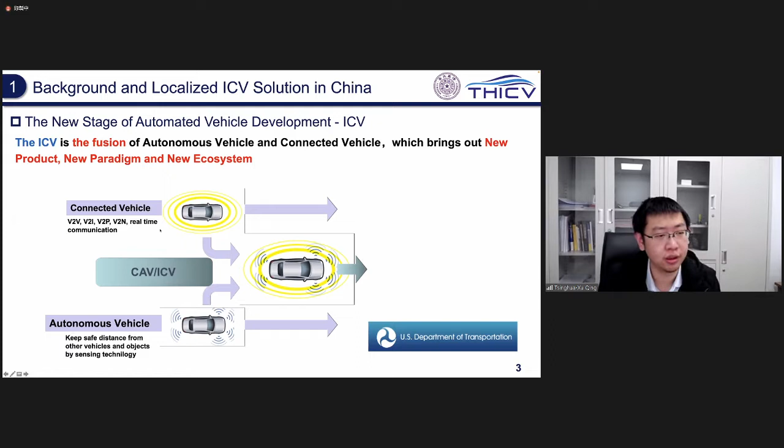Different from conventional vehicles, there are two major features of intelligent and connected vehicles. Number one is the interdisciplinary and cross-industry integration. So as shown in the slide, unlike the conventional vehicle, which is a mechatronic product, ICV requires the fusion of mechatronics and ICT technologies, including communication, computing, and so on. This underlines the industrial integration of automotive, transportation, information, and communication technologies.

And number two, ICV has strong regional and social properties. The operation of ICV requires support of telecommunication, maps and data, and so on, which are under security monitoring due to national security sensitivities. So each country, including China, has its own standards and regulations. Localized factors exist in the development and application of ICVs.

The Chinese government promotes policies and regulations for ICVs very actively. The government has established some cross-department coordination processes and formed some top-level design for the development of ICVs. For example, the Ministry of Industry and Information Technology launched the ICV Development Action Plan, which is very important. The Development and Reform Commission launched the ICV Innovative Development Strategies. The Ministry of Transportation strengthened product application and pilot demonstration, and the Ministry of Natural Resources expanded the market of map and positioning applications.

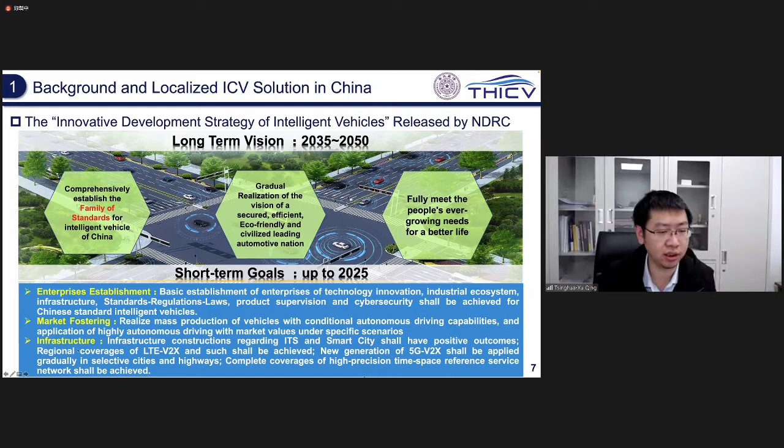For example, the Innovative Development Strategy of Intelligent Vehicles released by the NDRC, which is short for National Development and Reform Commission. In their strategy, there is both a long-term vision from 2035 to 2050 and some short-term goals up to 2025. For the development of ICVs, they try to stimulate enterprise establishment, market fostering, and infrastructure development and deployment.

A localized solution for ICVs in China is very necessary. There is yet no experience of successful applications of ICVs anywhere in the world. The localized solution of ICV innovation and development in China shall be planned not only according to the needs of technology and industry development, but also considering some specific conditions in China.

So to develop automated driving vehicles, there are two approaches. Number one, shown in the first picture, is the incremental paradigm of vehicle intelligence level improvement. This means to gradually increase the intelligence level of automated vehicles from level 1 to level 2, level 2 to level 3, level 3 to level 4, and so on. However, current gaps in automotive electronics, control, and actuator designs in China would be continuously expanded following this process, and might result in, as shown in the slides, hollowness of the core technologies in the automotive industry.

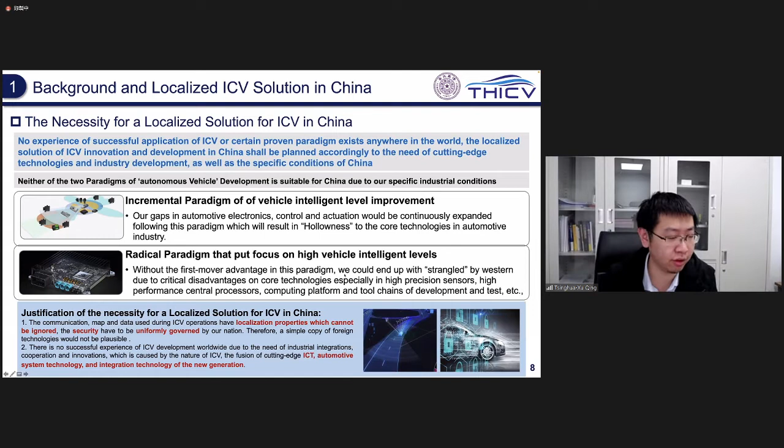What are the localized ICV solutions? The localized ICV solutions in China should follow the following three standards. Number one is to comply with Chinese infrastructure standards, including the standards for the roadside infrastructure, map data, V2X communication, and so on. Number two, they should follow the Chinese connected operation standards, including standards of ICV access, supervision of connected operation, information security, and so on.

Number three, they should comply with the new standard architecture of automotive products in China, including standards of intelligent terminal, intelligent onboard computing system, the cloud control platform, and so on. That requires us to design and develop some unified fundamental technologies to support the automated driving applications.

So to do so, the experts in China had a long-term discussion. The conclusion was that 5 basic platforms must get developed, and they are the basic computing platform, basic intelligent terminal platform, basic cloud control platform, basic dynamic HD map (high definition map) platform, and cybersecurity platform.

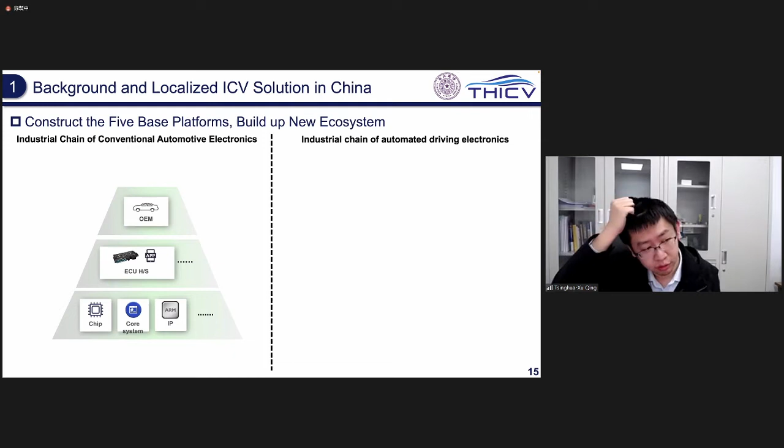Those 5 basic platforms will provide fundamental and common technologies for the automated driving application developers and decouple them from the unique Chinese standards. To better understand what we said in the last slide, we can have a discussion on this slide. So currently, there are OEM, Tier 1 and Tier 2, maybe Tier 3 and so on. Tier 1 companies provide the product to the car OEM, and Tier 2 companies provide some key components like chips or core systems, or maybe some IP cores to the Tier 1 companies.

In the future, there will be some space between Tier 1 and Tier 2. We call them Tier 1.5 companies. Those companies will work on some new crossover technologies, like the basic software architecture, some AI applications, and so on. And the basic platform components and services shown in the last slide will be their output, will be their product.

So in this slide, we take the basic onboard computing platform as an example. The companies below Tier 1.5 provide the basic computing platform, which includes the chips and IP cores from Tier 2 as before, and Tier 1.5 provides the ICV OS, which is an extended OS concept, some function software, and some basic board reference design.

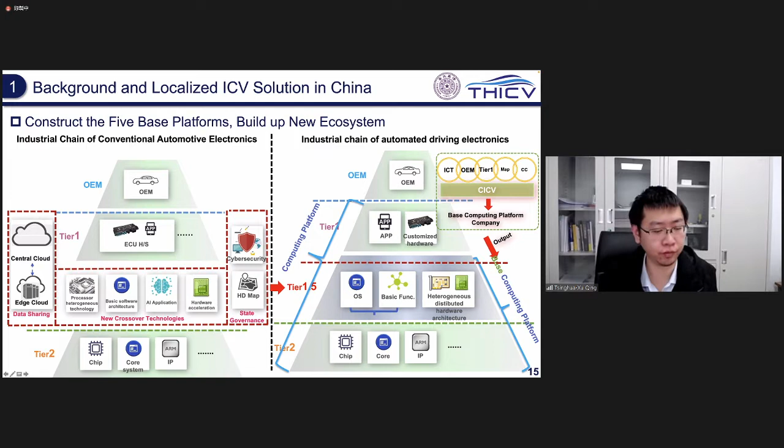All right. This is another diagram describing the relationship among the OEM, Tier 1, Tier 1.5, and Tier 2 companies. Similar to the previous slide, the Tier 1.5 companies get resources from lots of different Tier 2 industrial chains and try to provide a basic fundamental computing platform with a hardware reference design and ICV OS. The Tier 1 and OEM, based on what Tier 1.5 provides them, customize their own upper level applications according to the requirements from the customers and provide the product to them.

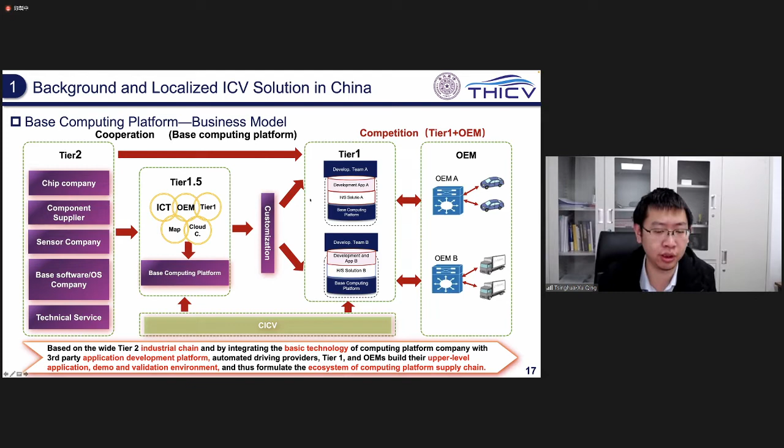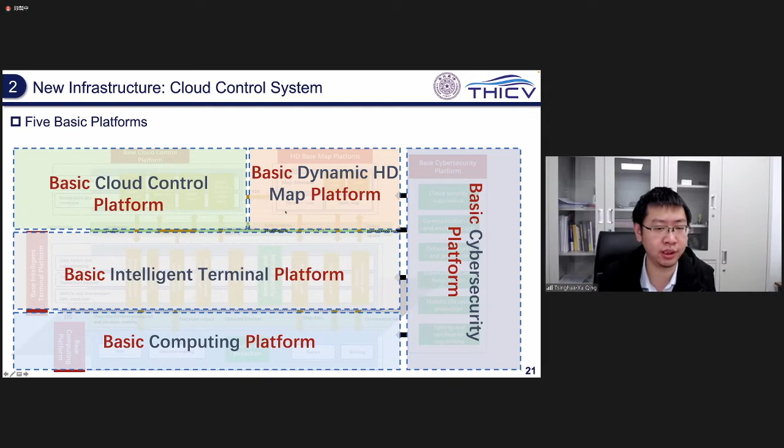All right, that's the background and the localized ICV solutions in China. In the following section, we will continue to talk about typical new infrastructure in China, the cloud control system. We will start with the basic cloud control system. A basic cloud control platform is one of the 5 basic platforms in China, as we introduced before. If we get a glance of the traffic system in the future, with the support of the cloud control system, the vehicles are expected to satisfy safety, fuel economy, convenience, and efficiency.

China was one of the first countries to classify the levels of intelligence and connection of intelligent and connected vehicles. In 2016, the levels of connectivity of ICVs were first proposed in the technical roadmap of ICVs in China. 3 levels of connectivity were classified, including connected assistance information interaction, connected cooperative perception, and connected cooperative decision-making and control. This was an innovative concept and a new path for the industry to develop intelligent and connected vehicles. Some detailed technical frameworks were under revision.

That means to develop some specific AD tasks, we have 2 approaches, similar to the very first slide at the very beginning. We can either develop some onboard intelligence, or we can develop some connected intelligence. So an automated driving task can be accomplished by increasing either the intelligence level or the connectivity level. Well, the ultimate goal, of course, is still to develop both levels, for safe, efficient, comfortable, and fuel-economic driving. To develop the connectivity intelligence, the cloud control platform plays a very important role. The cloud control system, which we define as a new type of infrastructure, is required in this procedure.

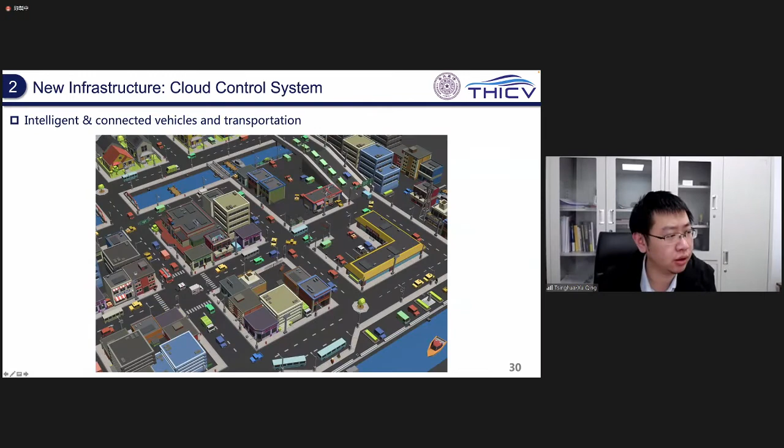If we look at a traffic system in the future, the cloud control basic platform contains the hardware, including some data center. This is the cloud, cellular station here, in charge of the communication, and the intelligent roadside system has the sensors and some roadside computing devices and so on. And they can provide some digital twin information. The digital twin is a map of what's happening in the physical space to a cyberspace.

And some prototypes of basic fundamental functions that cover multiple traffic scenarios should also be provided by the basic platform, like formation control, automated parking, and signalized coordination for the vehicles, and so on. And what the application developers do is they design the applications and form some specific services, like the shared vehicles, the mobility taxi service, intelligent public bus service, intelligent logistics, and so on. They design their own applications and publish them on the basic cloud control platform, and together they form the whole cloud control system.

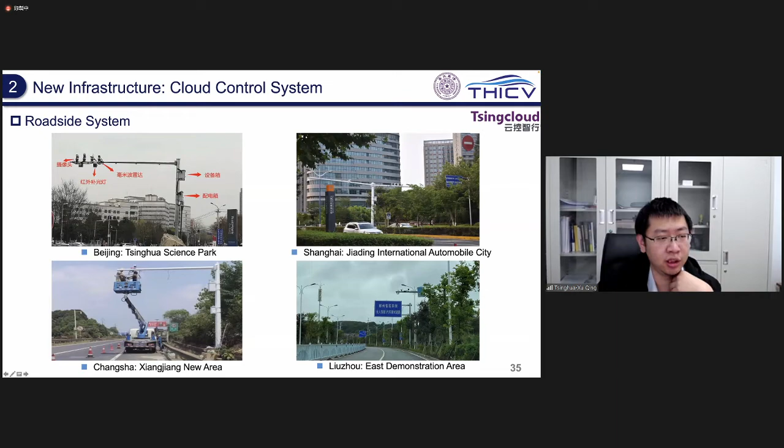In this picture, here is a deployed roadside system. This is the radar, it looks like this. This is the camera, and for the camera to be able to see the vehicles and the pedestrians, we have the flashlight here. The computing unit is installed here, and the communication devices are installed here. We also developed several mobile roadside units for rapid testing, validation and verification of our perception or decision algorithms.

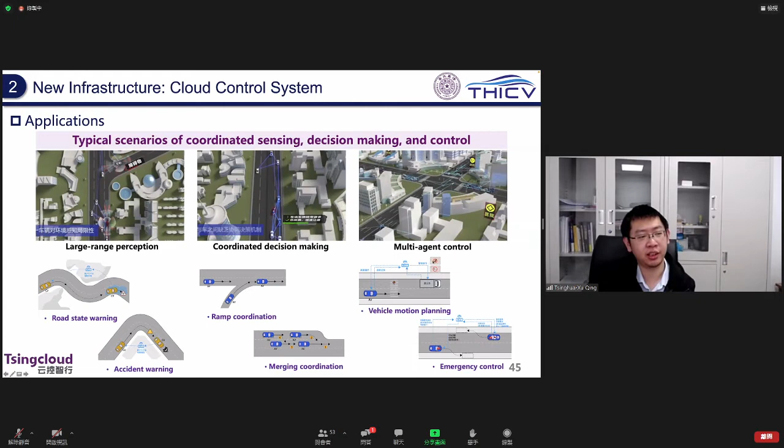So equipped with the digital twin system or the CPS system, we designed some basic functions, including the large-range perception, coordinated decision-making, and the multi-agent control, and tried to perform some demonstrations and tests. People also used our basic platform to develop their own applications.

As you can see in this slide, there are some of them. Most of them, I have to say, are still under development and testing, and some of them we are demonstrating in Yizhuang in Beijing. Some specific systems are developed and applied in practice already.

This slide shows some fuel economy driving for the commercial vehicles like trucks and so on, with cloud-based optimization and dynamical map information. So with the help of the processing power in the edge cloud, some complex dynamical programming model and algorithm can be applied and calculated in real time, which is impossible if we only have some onboard devices, especially some embedded devices nowadays. The fuel consumption reduction achieved about 4.0% in typical heavy scenarios.

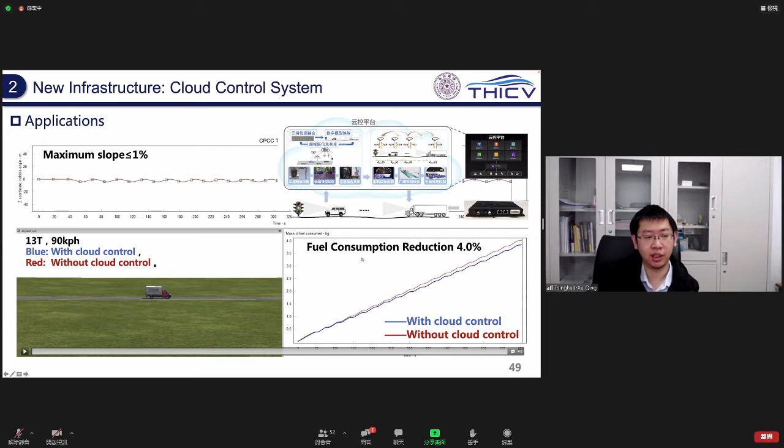So basically, we use the slope information from the digital map. If we can get some dynamical information from the digital map in the future, like the traffic light information, the intersection information, on-ramp, off-ramp information for the highway scenario, we believe we can achieve much better results in the future.

Another application we already have is to use the cloud control system to help optimize the traffic efficiency. For example, getting the vehicle information from the taxis from the Didi company, the traffic signal can get optimized according to the dynamical requirements from the taxis and from the other vehicles. The average speed in our test district can increase from about 15 kilometers per hour to about 23, 24 kilometers per hour, which is very significant.

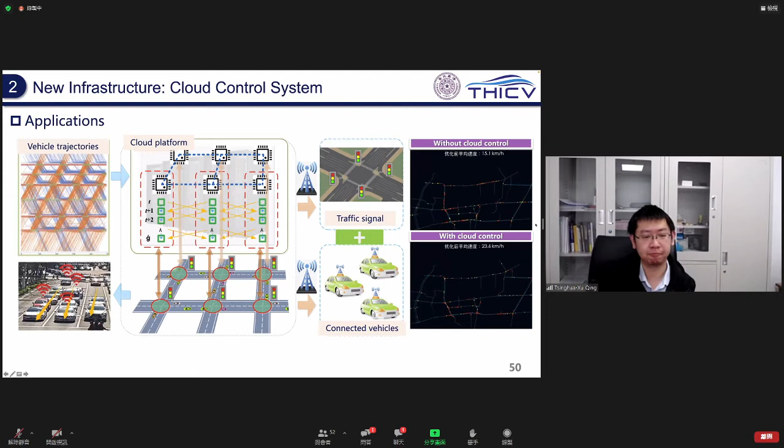So as we already know what the cloud control system is, in the following slides, we'll discuss specific applications. This application is, we believe, what will happen in the future with the help of cloud control system, which is the cloud-based formation control of intelligent and connected vehicles.

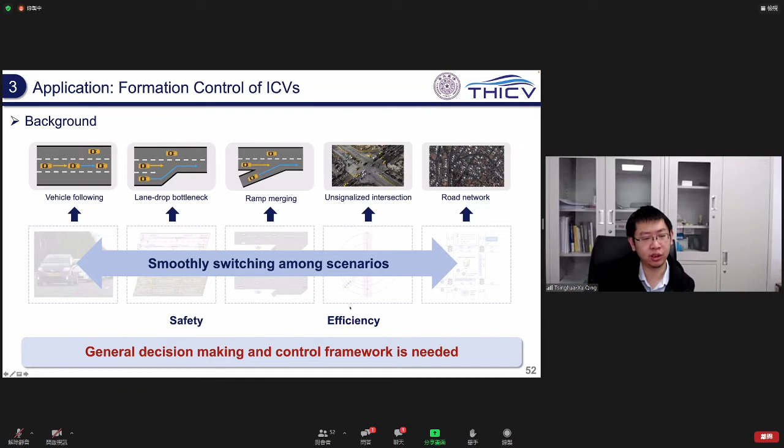A common way to design the ADAS and automated driving is to develop some applications based on different driving scenarios, including like the vehicle following, lane drop bottleneck, ramp merging, intersections, and so on. However, the control logic would be very complex, and it would be difficult to smoothly switch among multiple scenarios, which could damage both driving safety and traffic efficiency. So, a unified decision-making and control framework that covers most of the typical traffic scenarios is required.

As we discussed before, the cloud control system excels at real-time data and information sharing, and can provide some high-definition perception results and data mapping results, and so on. The cloud control system is very good at management of multiple applications and can handle large-scale vehicle coordination.

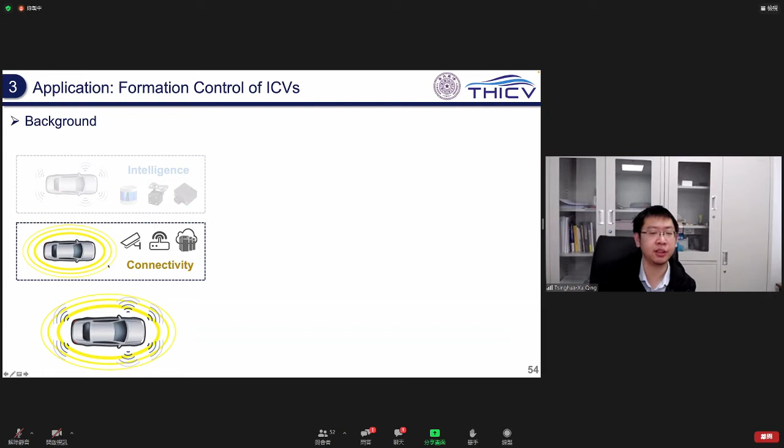Previously, we discussed the two roads for the development of intelligent and connected vehicles. And the connected intelligence is the key road of developing ICVs, at least in China. And currently, there are some existing researchers in this field. For example, some researchers focused on the single-lane platoon scenario, which is obviously too simple to get practically applied.

Some work on the multiple platoons, which means only the leading vehicle or the preceding vehicles have the intelligence, and the other vehicles just follow them. And there is only the coordination among the preceding vehicles, which is not enough. And some research works on lane assignment, only lane-level assignment, no detailed vehicle control. They just tell vehicle A, you go to lane 1, vehicle B, you go to lane 2. They don't care how the vehicle achieves their goals.

And what is most interesting is a multi-lane formation algorithm. But what we found, most of them lack switching among multiple scenarios. They only focus on some specific scenarios.

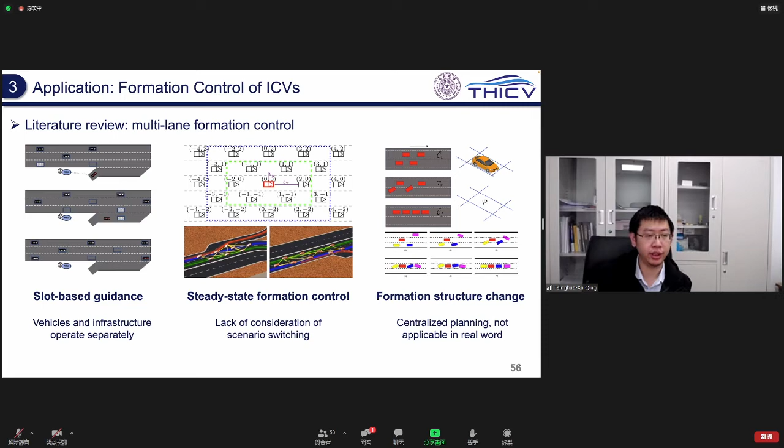Number two, a bunch of researchers focus on steady state formation control and lack consideration of scenario switching. Number three, some researchers work on formation structure change. They try to find a method to dynamically change the formations, but some of them use centralized optimization methods like the large-scale nonlinear MPC, which could be not applicable in the real world because a lot of calculations are required, so they cannot achieve real-time calculation. And most of the researchers require predefined vehicle orders. Thus, they are not flexible enough for real applications.

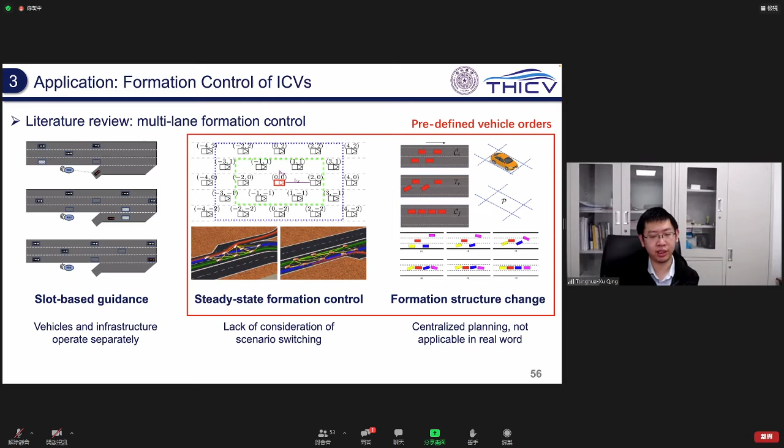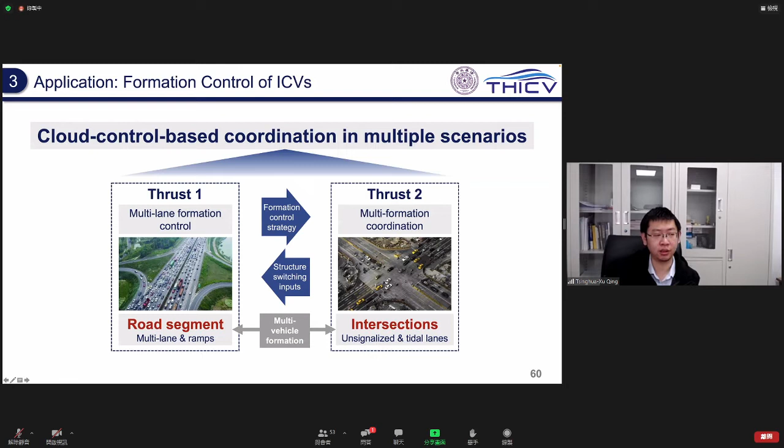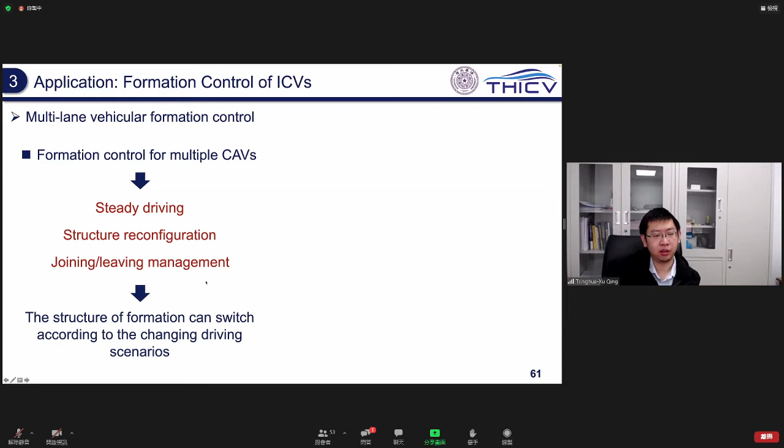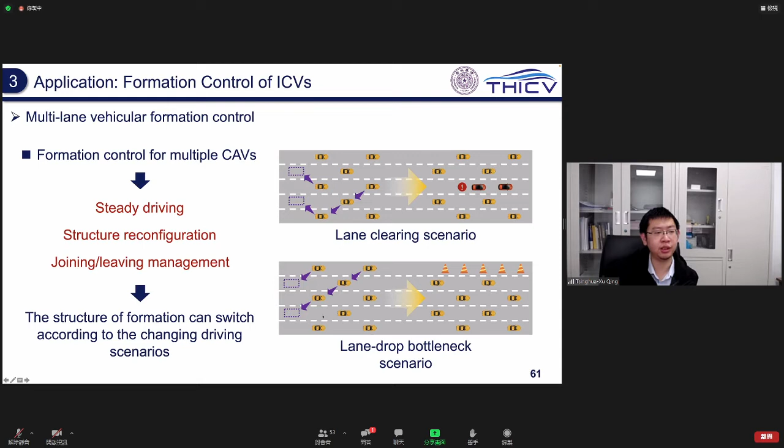Formation control of multiple vehicles solves the problem of steady driving of a group of vehicles, structure reconfiguration when the driving scenario is changed, and vehicle joining and leaving management. The structure of the formation can get switched according to the change of driving scenarios. For example, we are having formation control here, but in the lane clearing scenario, there are some other conventional vehicles, and the lane drops. So we have to change the formation from a 5-lane formation to a 4-lane formation. Similarly for the lane drop scenario.

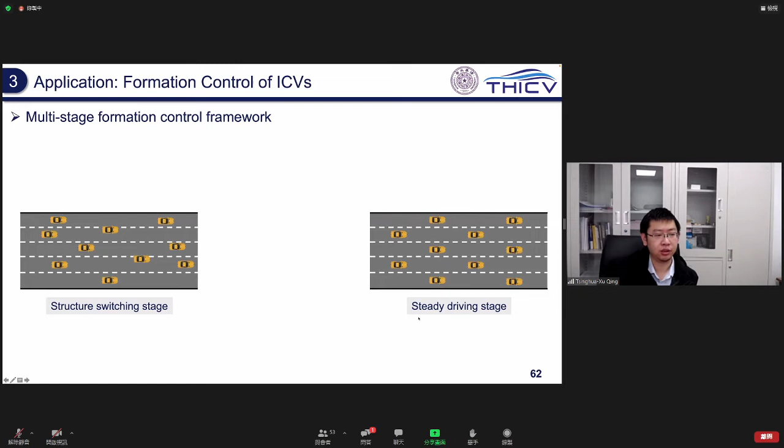Here we introduce a multi-stage framework of the cloud control formation control method. The initial positions of the vehicles are distributed randomly on the road, and we expect them to drive with some specific structures, which are predefined by us, but pay attention to the order. The orders are not predefined, only the structure is predefined. So there are two stages for the vehicles' motion. One is the structure switching stage. The other one is the steady driving stage.

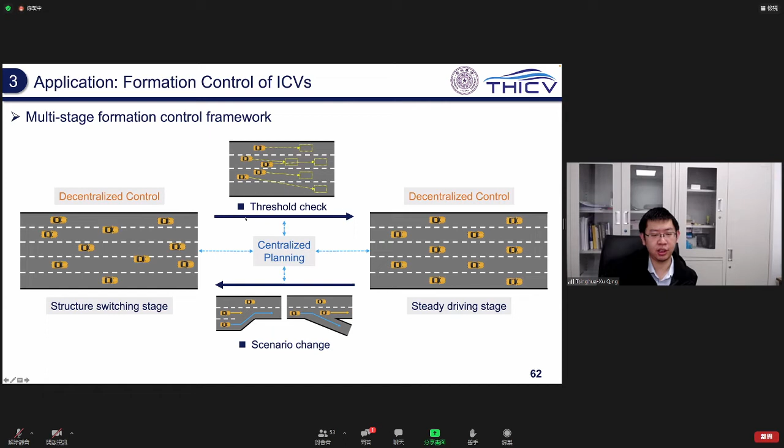We propose a centralized planning method to organize the behavior of the vehicles, which, of course, as it is centralized, should be running on the cloud. When the vehicles are close to their desired positions and the threshold is satisfied, they change from the switching stage to the steady stage. And then when a scenario change is detected, they change back to the structure switching stage. We use centralized planning to calculate the conflict-free behavior of the vehicles. And for each vehicle, we use decentralized control to calculate the control input.

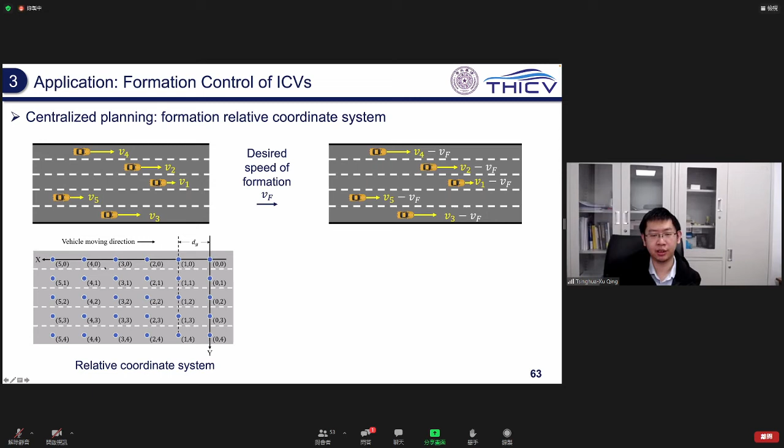Given that it is hard to control the vehicles from the real world perspective, because vehicles drive with different speeds and have complex conflicts, we measure the desired speed of the formation from the speed of all the vehicles, and we can then get the relative speed of the vehicles, which is easier for us to use. And then the relative coordinate system is built. The coordinate system contains several relative integer points. They are discrete. Laterally they are distributed by lane, and longitudinally distributed by the predefined following gap.

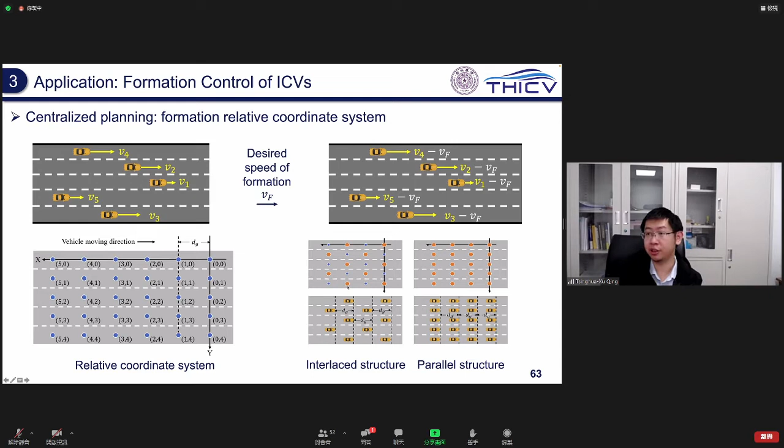In the relative coordinate system, vehicles occupy some points to form the interlaced structure and can temporarily stay on their points when they are changing the structure. So a pair of numbers is used to represent the coordinate of the vehicles: the layer ID, which is x, and y, which is the lane ID.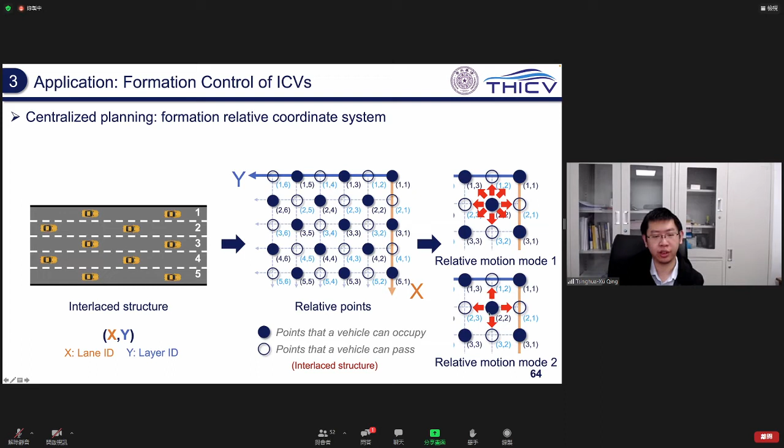Besides, we define the achievable points for the vehicle at each timestamp. Relative motion mode 1 represents the vehicle could drive to their other 8 neighborhood points, and also including their current point in one timestamp. Relative motion mode 2 represents that they can drive to the surrounded 4 points and the current point in each step, in order to regulate the motion of the vehicles and avoid collision.

We assume that the duration of each movement takes the same time. So before the motion planning, we need to assign vehicles to their target locations. Different assignment may lead to some unsolvable conflicts among those vehicles, which lead to some car accidents. Target assignment is a classical problem in robotics motion planning and control.

Because the robots usually perform straight strategies, and the speed of the robots are usually relatively low. However, in vehicle target assignment, we need to consider some complex constraints and avoid collision between or among the vehicles. In order to assign the vehicle target, we should define the cost of the assignment first by applying the A-star algorithm for the vehicles to calculate the cost of the vehicles needing to travel to their target locations, which is then defined as the cost.

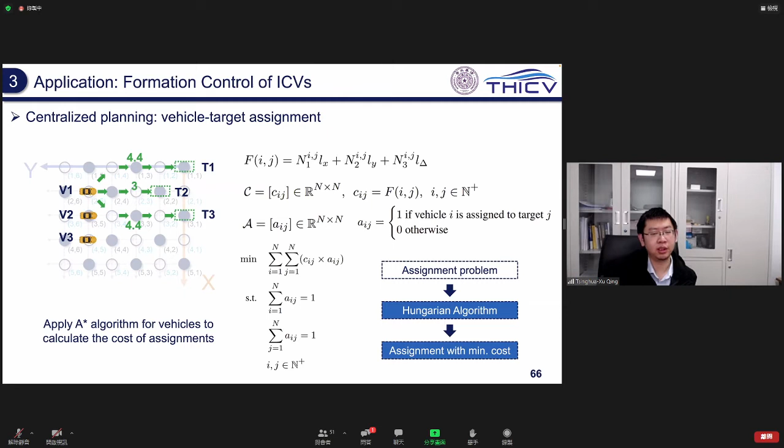Then the cost matrix, short for C here, and the assignment matrix can be defined accordingly. Some target assignment problems can be modeled as an integer programming problem. There are many mathematical algorithms designed to solve this kind of assignment problem, and the Hungarian algorithm is one of the most widely used, which can calculate the optimal assignment with a minimal cost.

As mentioned before, because of the complex constraints of the vehicles, some of the assignments may lead to inevitable collision. So here we define 3 types of conflicts that may cause collision because the trajectories of the vehicles will overlap. Vehicle 3 and vehicle 4 represent the first type of conflict. If vehicle 3 stops here, it will block the way of vehicle 4, so vehicle 4 is in conflict with vehicle 3. There are 2 other types of conflicts shown in this slide accordingly, and we can prove that only the first type will cause the collision.

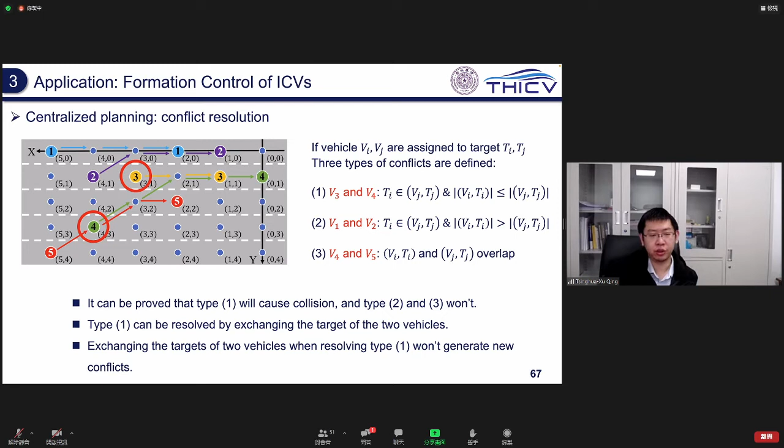We found that the first type of conflict can be resolved by exchanging the targets of the 2 vehicles, and this exchange will not cause new conflict, as we can prove. All the conflicts will be resolved in finite steps.

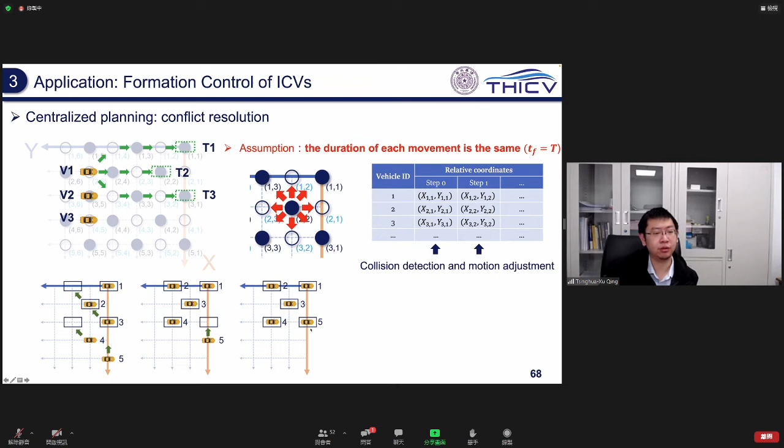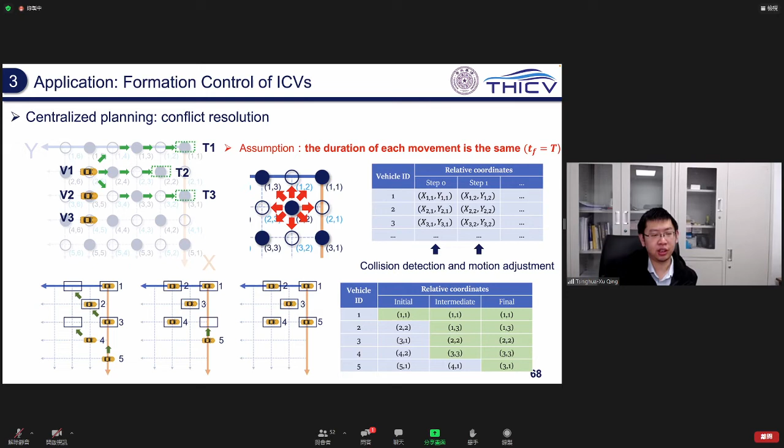Based on the defined algorithm and assumptions, we can then build a coordinate map to describe the motion adjustment of vehicles. In this slide, there shows an example of a 2-step process for the formation structures reaching step 1 and step 2, and the coordinate map is built to detect collision. Once a collision is detected, the conflict solving algorithm will be used to solve them.

This is the same example as in the last slide, where the vehicles change from the 5-lane formation to 3-lane formation. The upper part shows the movement in the relative coordinate system, and the lower part shows the state in the real world. The points in the real world are the key points, as we discussed before, and they are used for vehicle trajectory planning. The vehicle needs to plan the trajectory on its own to follow the key points.

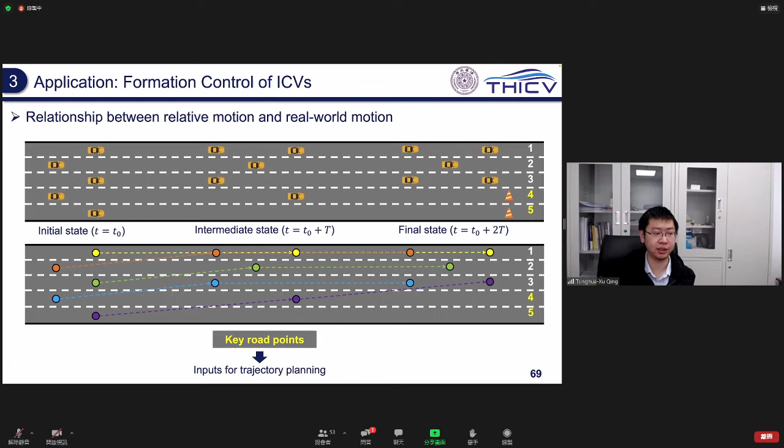So the algorithms before this slide are done by the cloud control system, by the server. Here, the slide after this slide are done by the vehicles.

Since a vehicle should pass a sequence of points to achieve its target, the multi-stage trajectory is planned based on Bezier curves to perform single lane change, dual lane change, multi-lane change, and so on. The red point represents the key road points corresponding to the points in the relative coordinate system, and the time for the vehicles to travel on each segment is the same. We have to make them the same.

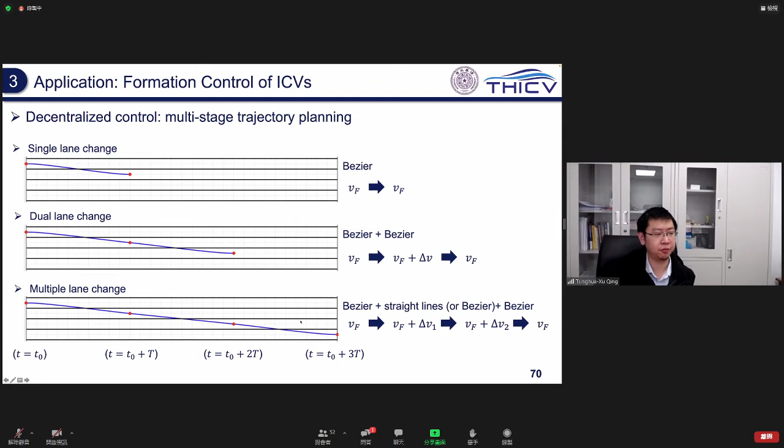So as for the longitudinal control, we can calculate the length of the trajectory as their input. Our goal is to control the vehicle to arrive at each point at the desired time, strictly at the desired time. The state of the vehicle is fixed at the initial and terminal points, and they have spatial temporal constraints at the intermediate points - the points in the middle have to follow the spatial temporal constraints.

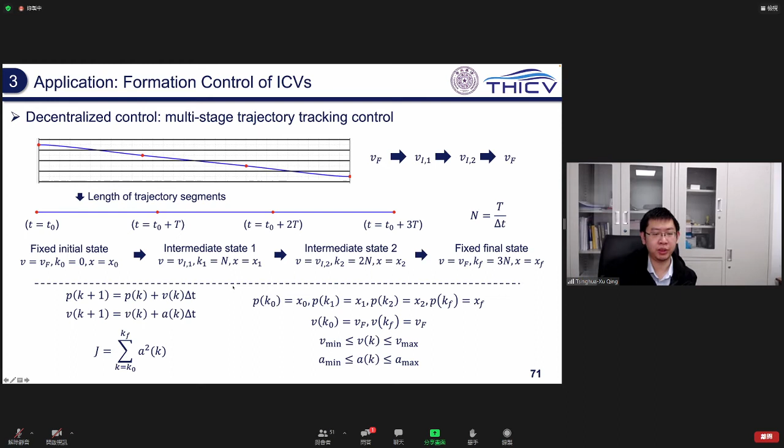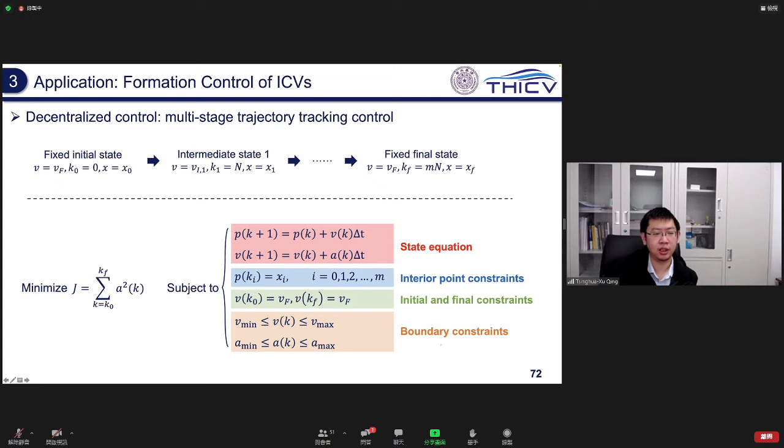The second order state equation is used to model the longitudinal behavior of the vehicles, and then the control energy, using acceleration, is calculated as an objective function. Thus, the longitudinal control problem is modeled as an optimal control problem, and with the state equations, interior point constraints, initial and terminal constraints, and boundary constraints, we can solve this equation.

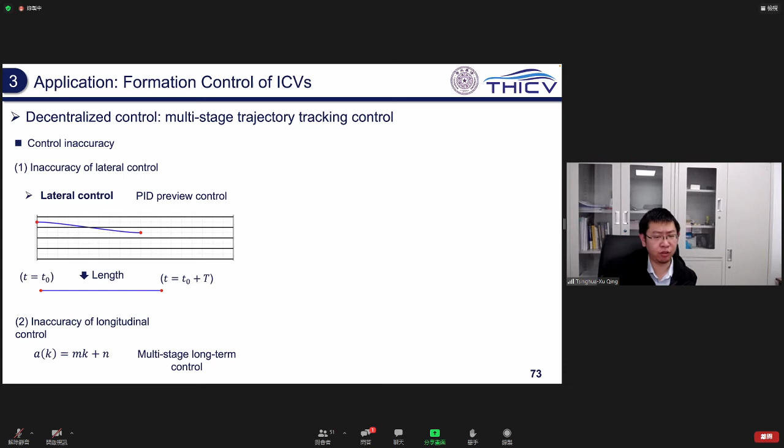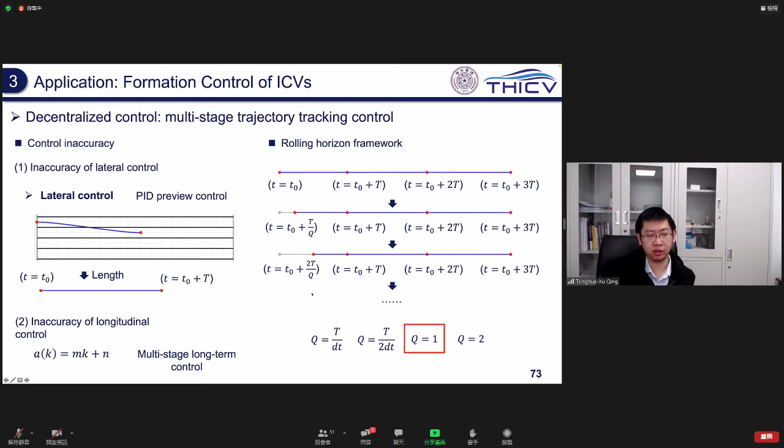As for the control inaccuracy, since we use PID preview control as a lateral control method, the inaccuracy may accumulate over time. And we model our longitudinal control problem into a multi-stage long-term control problem, which may also lead to some accumulation of inaccuracy. Thus, we use the rolling horizon framework to replan the control input after some fixed steps. We will not talk too much about them today.

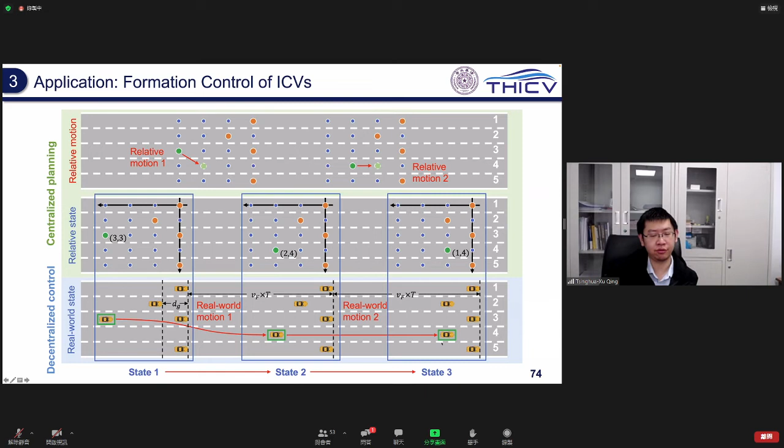In this slide, we provide an example of how to show the relative motion, relative state, and what happens in the real world. The green vehicle needs to catch up with the other 4 vehicles to form a 5-vehicle formation. The first step is to move forward by one layer and change to the right lane, and real world motion 1 shows its trajectory. For the second step, it should accelerate. The vehicle must move forward 1 more layer and successfully join this formation. This is what happens.

So we summarize the method of the multi-vehicle formation control into the following 3 parts: number 1, the real world status; number 2, centralized planning; and number 3, decentralized control.

The centralized planner in the cloud can detect the real-world changes and chooses the desired formation structure, generating the target locations and target states, including location and velocities for the vehicles. Vehicles are assigned to the targets, and some collision-free motion to travel to the target are also calculated and planned.

The decentralized controller on the vehicle plans the trajectory according to the relative path, and some multi-stage control inputs are calculated for the vehicle control, and the control commands are sent to the actuators. The process changes the state of the group of vehicles to adapt the driving scenario.

Okay, so this is how the closed loop works.

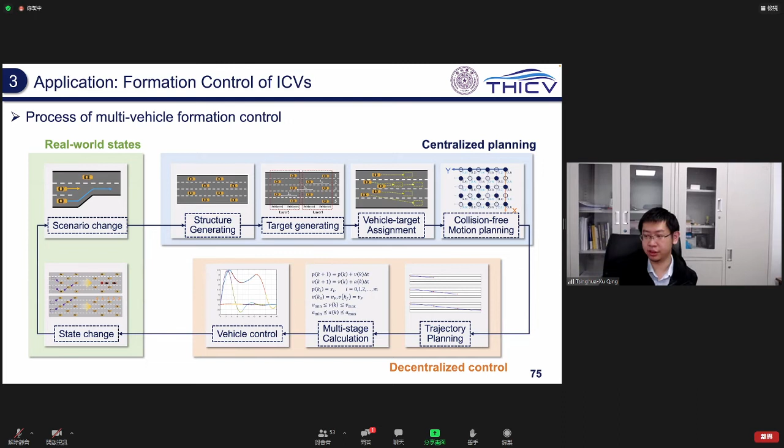We also did some more simulations in a lane drop bottleneck to verify the performance. The length of the scenario is about 1,000 meters with the lane drop bottleneck, and the benchmark method, the compared method, is the default model in SUMO. We also did this simulation in SUMO.

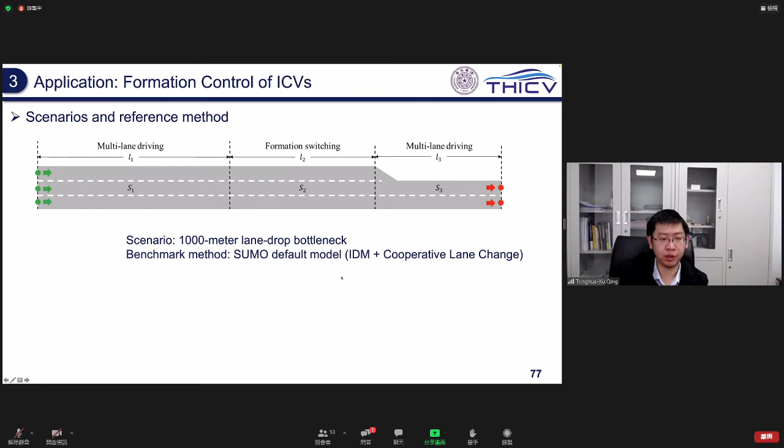There could be some cause of congestion at high vehicle volumes if we only use the default model or the default method in SUMO.

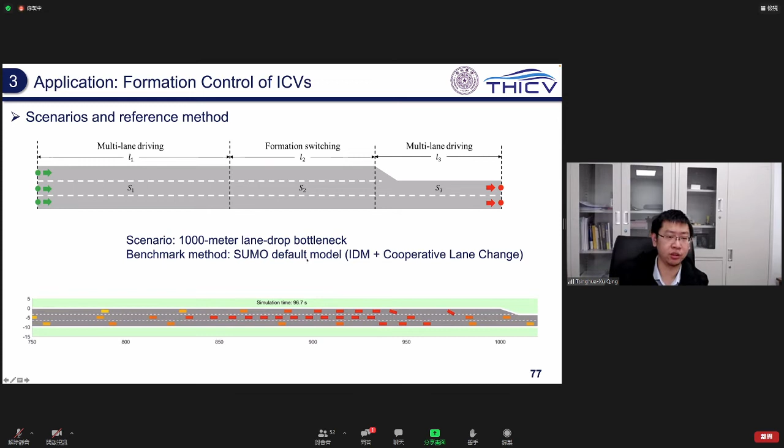This video shows the process of the formation control method under 3 different input volumes. You can see that under these 3 volumes, the formation control method can smoothly control the vehicles and change their lanes to keep a steady and high speed.

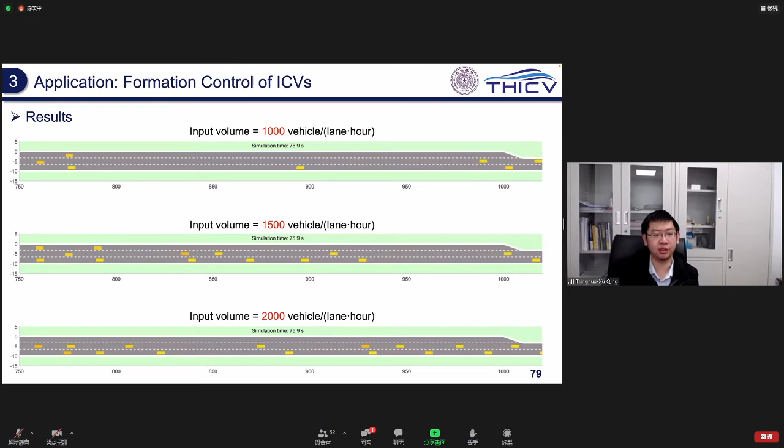If we put the methods together, we can see that the benchmark method leads to congestion, while the formation control method can still keep high efficiency and no congestion happens.

That also tells us we really need a cloud control system. We need communications, we need coordination among those vehicles in the future. Even if we can develop very high level onboard intelligence, the vehicles could be selfish, and the lack of optimization of the whole traffic system can still lead to some traffic congestions.

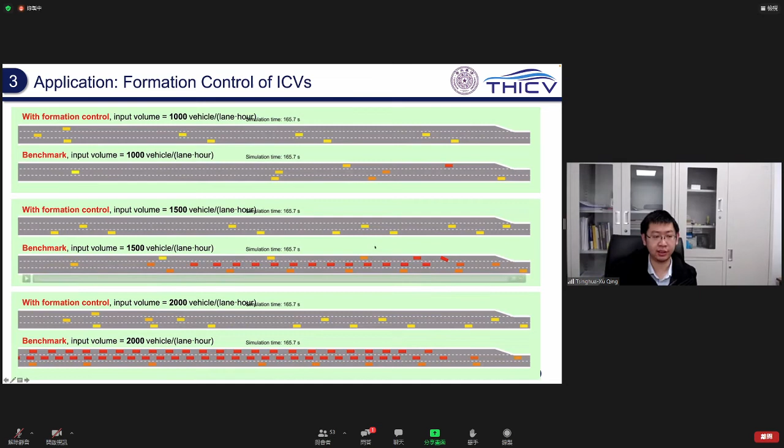The spatial temporal distribution also indicates the same result. We won't talk too much about this slide.

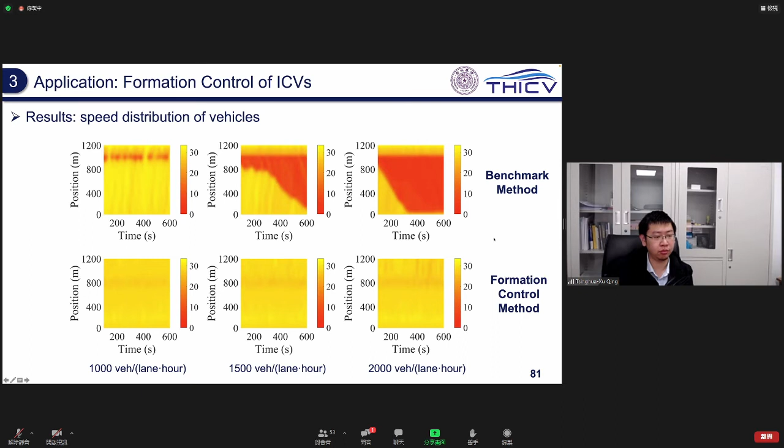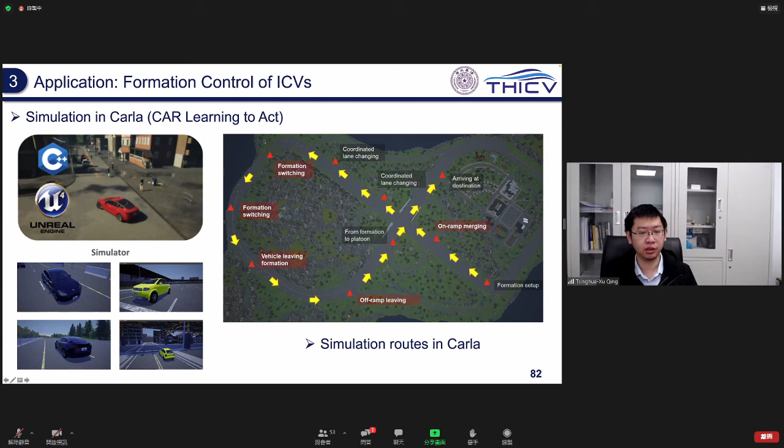We also conducted simulation in the Carla simulation environment and evaluated the performance of the formation control method in multiple traffic scenarios. The figure on the right-hand side shows the route of the vehicles in the simulation.

As we tested before, there are some issues playing these videos, so I'll directly drag it. This video shows some relative state of the vehicles on the left, and on the right shows the real world motions of the vehicles. Of course, the real world means those in Carla.

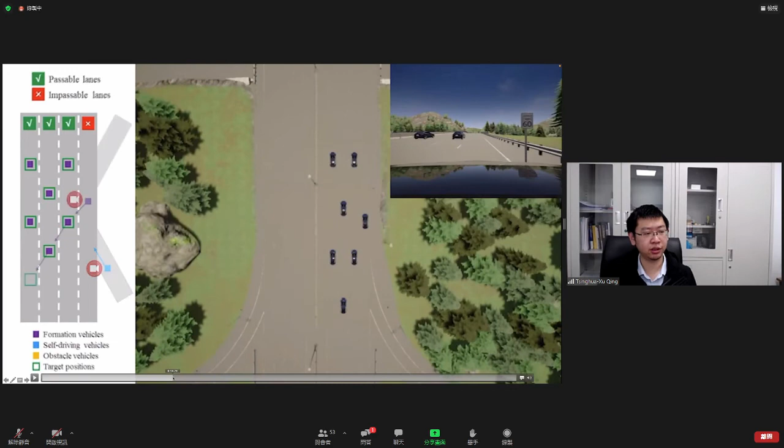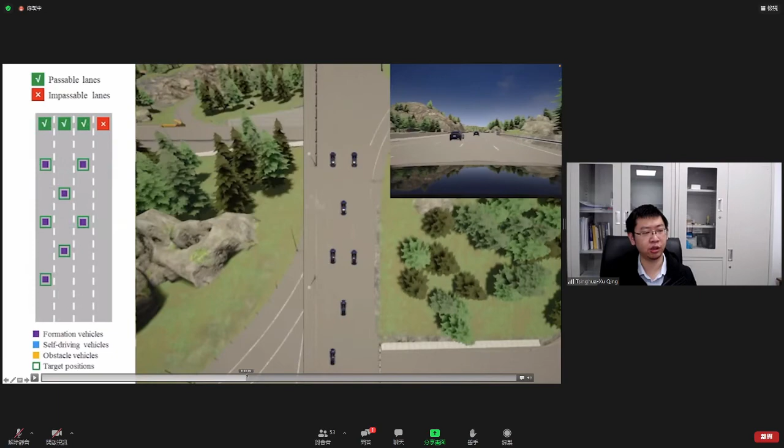There are 6 vehicles in the very beginning. Another vehicle joins them, and the lane drops from 4 lanes to 3 lanes. So the vehicles change their lanes coordinately, and then the lanes go back to 4 lanes, and the cloud tells them to change back to 4 lanes. The vehicles calculate and perform the lane change.

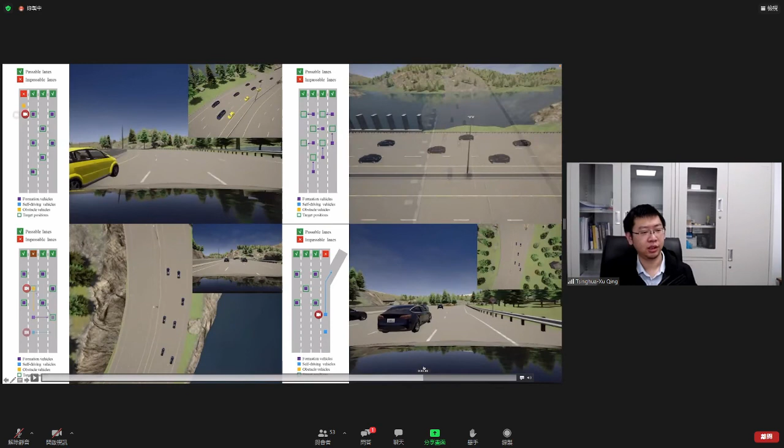There are some more scenarios as we discussed in the beginning, including some conventional other vehicles. The vehicles can change their lanes to pass them, and this method can also be used in some lane drop scenarios and other scenarios and so on.

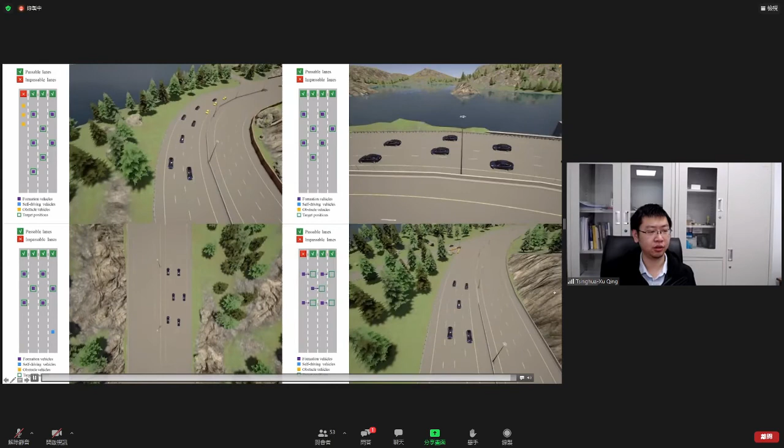All right. Oh, the video is working. No. All right.

If you remember, we tried to discuss if we can have a unified method that can cover multiple traffic scenarios. We only discussed the one-dimensional scenario, and now we will talk about the two-dimensional scenarios.

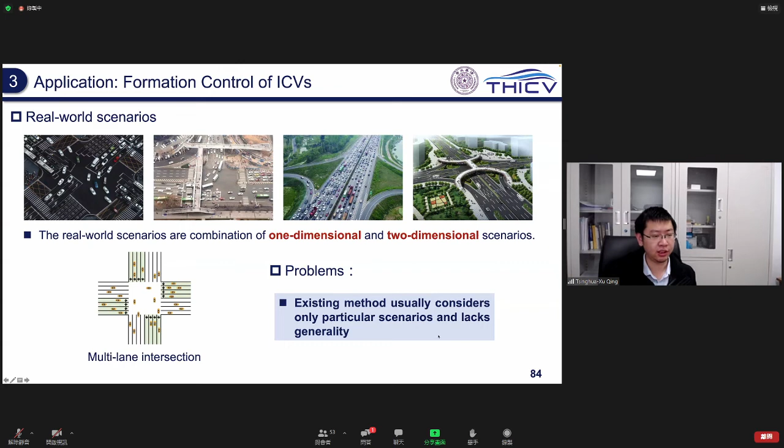Some typical challenging scenarios like the multi-lane on-ramps and multi-lane intersections and so on. We would like to extend our previous method to the two-dimensional scenarios and solve the problem that existing methods usually consider only some particular scenarios and lack generality.

The idea is very simple, but before that, we will see what existing methods already have. There are existing methods that can be applied to both single lane and multi-lane intersections, like the reservation method, which is a classical method, and some virtual platoon method. We will discuss this method a bit.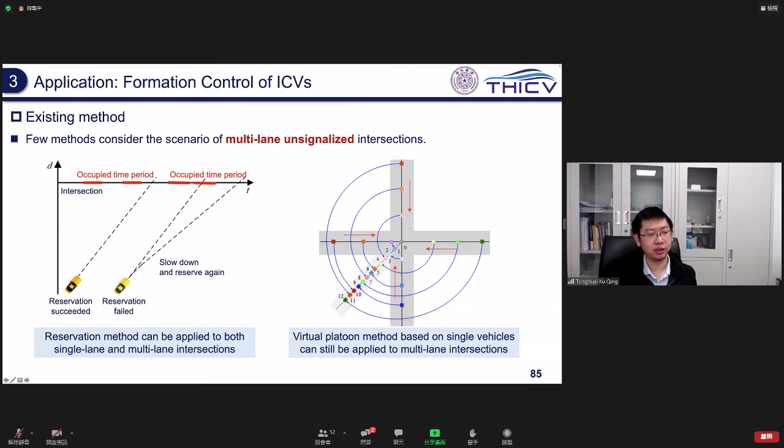The idea of this method at an intersection is to form virtual platoons and let all the vehicles coming from different directions pass the intersection one by one. The sequences were determined based on the distance of the vehicles to the center of the intersection. The method needs to define some virtual leading vehicles and provide some following input for the real vehicles.

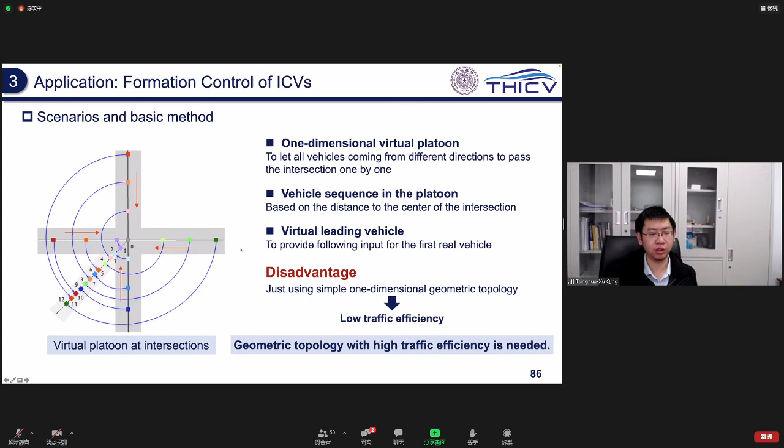The disadvantage of this method is very obvious, that it only considers one-dimensional geometry topology, which results in very low traffic efficiency, because usually we have not only a platoon but multi-lanes. So a geometric topology with higher traffic efficiency is required.

To achieve that, we first need to build some conflict model of the unsignalized intersections, including crossing, merging, and diverging conflicts, as you can see.

Based on the conflict model, we can then number 12 traffic flows coming from 4 directions to calculate whether they are conflicts or not. Based on this, we can draw the conflict relationship in the diagram or graph, and use graph theory to solve this problem.

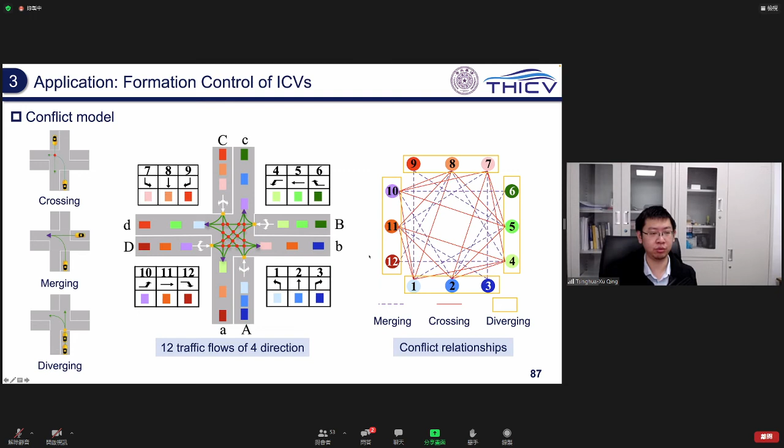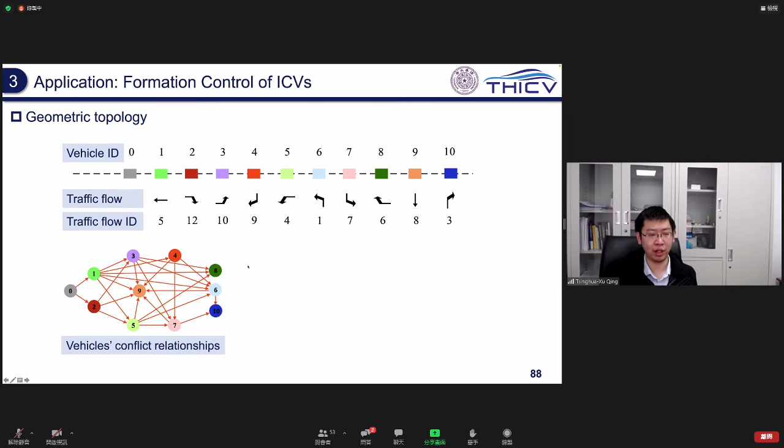Give an example, we can draw the vehicle's conflict relationship. This has vehicles with different IDs coming from different traffic flows, and we can draw the vehicle's conflict relationship graph based on the conflict graph. With the help of graph theory, the depth-first spanning tree can be deployed to calculate the conflict-free geometry topology.

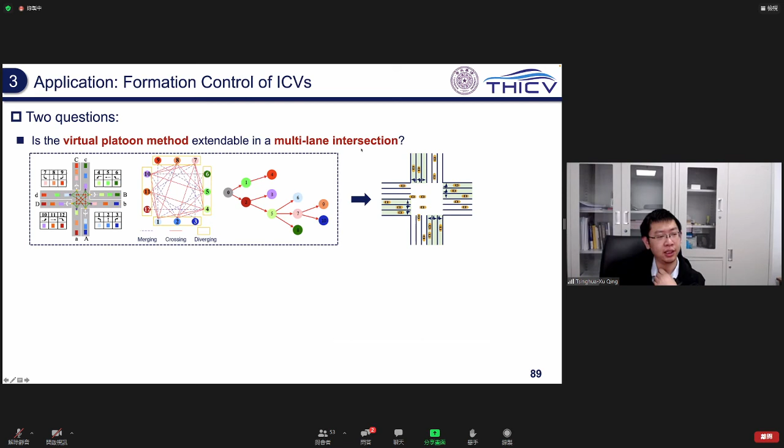So before proposing our method for a multi-lane unsignalized intersection, we have two questions. Number one, is the virtual platoon method extendable in a multi-lane intersection? And number two, will organizing vehicles in formation really improve the efficiency in a multi-lane intersection?

First of all, we check the conflict relationship to ensure safety. Similarly, depth-first spanning tree is also used to determine the conflict-free passing sequence.

But the difference is that the definition of the conflict constraints could be extended. You can see in the picture, the definitions could be different, and the passing sequence with the same coming sequence could be different. Then let's see how we have improved the virtual platoon method.

Consider vehicles coming from north, east, south, and west directions in an unsignalized intersection. We rotate them to parallel lines to make it easier to watch. What's on the left is a stop line, so the vehicle comes from the right to the left.

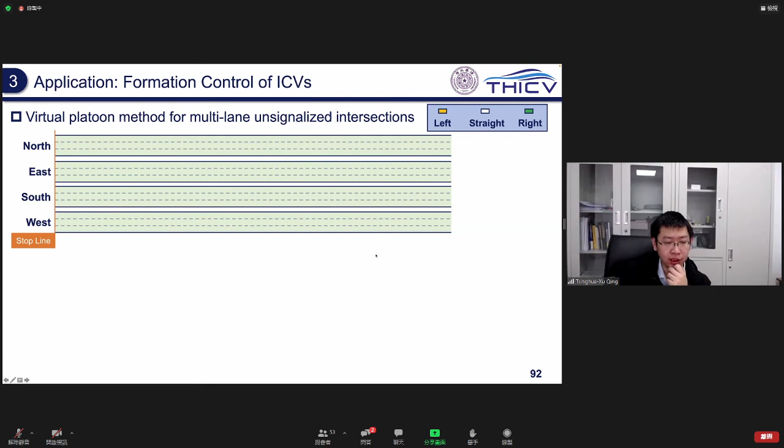Then let's look into whether organizing vehicles in formation could help improve traffic efficiency. We still start from the single vehicle platoon, which means a single vehicle is considered as a node, same as in the classical method. Utilizing the depth-first spanning tree, a possible passing sequence can be obtained, as shown in this slide.

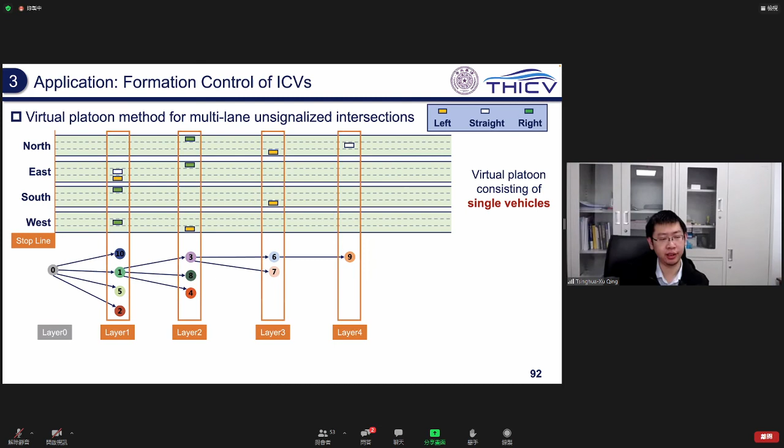So the virtual platoon consisted of a single vehicle in each layer. Now we consider another virtual platoon that consists of multiple vehicle formations in each layer. This virtual platoon treats a subgroup of vehicles instead of only one vehicle as a node in the spanning tree. So we get the same result, but each node indicates multiple vehicles. Similarly, the same holds for layers.

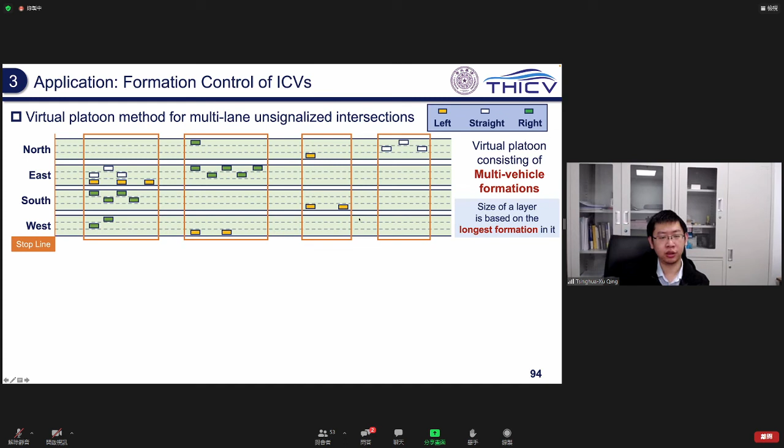So after the passing sequence is generated, we found it is possible to compress the platoon by sharing longitudinal space in one layer. Those subgroups without conflicts, for example the green vehicle in the second layer, can further push in, and those with conflicts cannot. So a compressed formation can be generated. The layers go from 4 to 3, which means we are saving some time, achieving more efficiency for the traffic system.

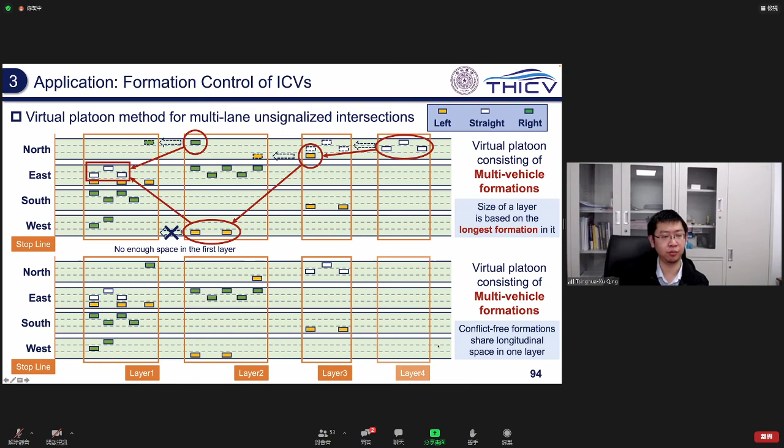All right, so here shows the final process in the multi-lane intersection. At first, some messy vehicles get together to form a multi-lane formation based on the method we talked about before. Then the formation is divided. The vehicles are assigned and form some subgroups here. Then we treat each subgroup as a node, as a single vehicle like before. The depth-first spanning tree method is applied to generate the conflict-free platoon coming from all 4 directions.

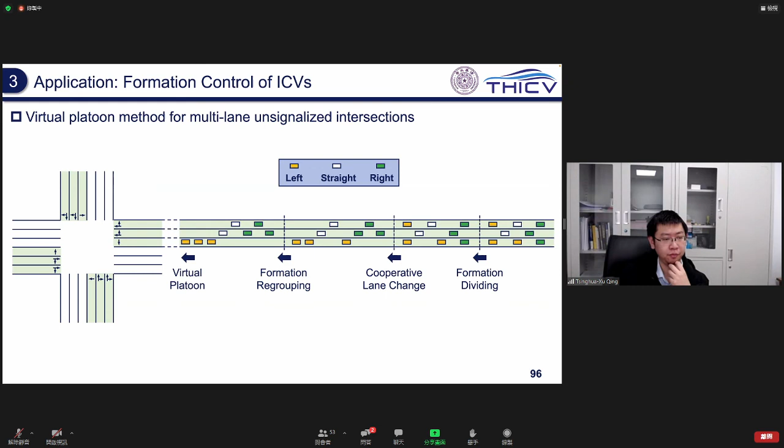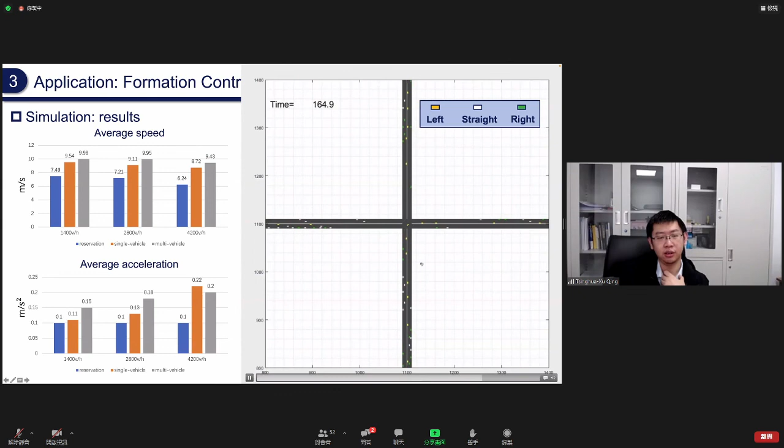As you can see in this slide, I'll just skip to this slide because of the time. I'm not sure if the resolution is good enough for you to see, but this animation shows the vehicles can pass the intersection without collision. And we can summarize like this. The virtual platoon method is still very efficient in multi-lane unsignalized intersections, and compared with single vehicle control, the multi-vehicle virtual platoon method can further improve traffic efficiency.

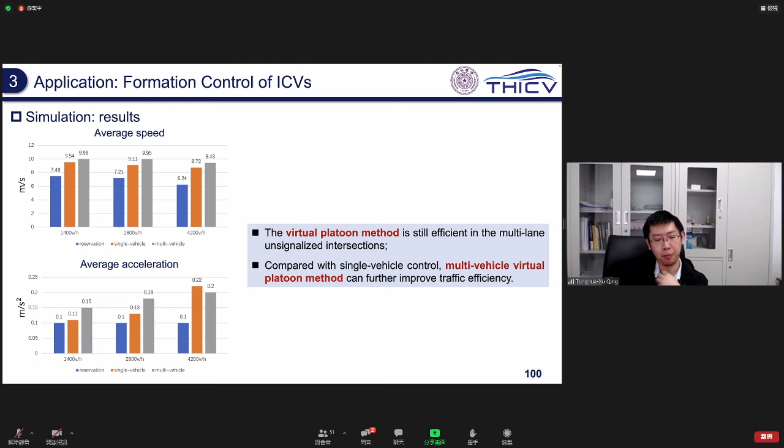And finally, we will give the summary. Today we discussed the background and localized ICV solutions in China. We know that China is promoting 5 fundamental or basic platforms. Taking the basic cloud control platform as an example, we discussed the structure, the details, the architectures of the cloud control system, and it is a new type of infrastructure for the traffic systems in the future. We also discussed an application for the cloud control system, which is formation control for intelligent and connected vehicles.